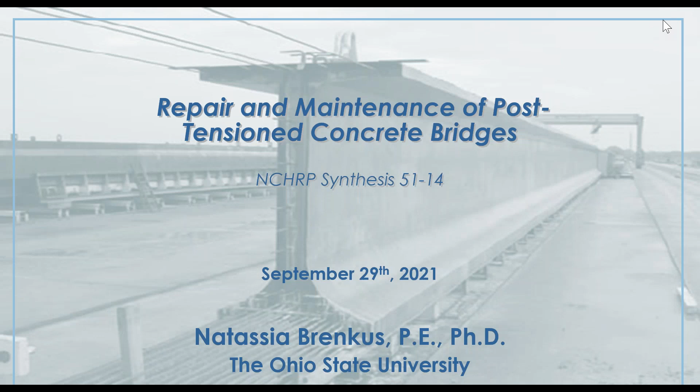There you are, all right, we see your screen. But maybe we still have you on mute. Can you hear me now? Yes, we can. Classic question. Yep, absolutely, it's the question of 2021.

Good afternoon, everyone. Thank you, Greg, for the introduction. Again, my name is Natassia Brenkus, and I am an assistant professor with The Ohio State University. As you mentioned, I will be presenting today on our research group's efforts to put together a report for the NCHRP program on the repair and maintenance of post-tension concrete bridges.

Just to orient everyone as to how these projects work, highway administrators, engineers, and researchers may often face problems for which there's already information, either documented or floating around out there in fragments. Synthesis efforts are undertaken to create a systematic assembly of that information and provide it to the highway community as a service to inform their practices. This particular project was an effort to gather information on the repair and maintenance practices of post-tension bridges, both in service and during construction, aiming to facilitate knowledge transfer across agencies so the information can inform bridge owners' repair and maintenance practices in the future.

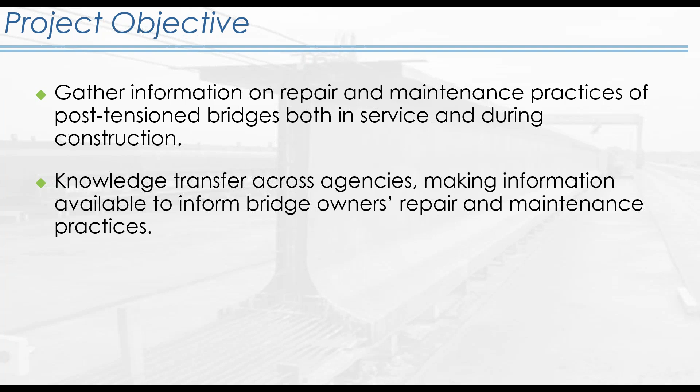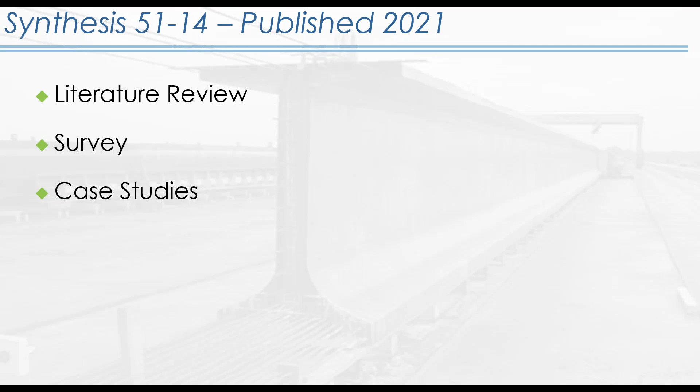This synthesis is 5114. It was published in 2021, and following the general format of these efforts, included a literature review of the state of the art, a survey distributed to state departments of transportation, as well as 5 case studies going into some depth on 5 separate structures that had undergone post-tensioning tendon repair and other actions to the PT system.

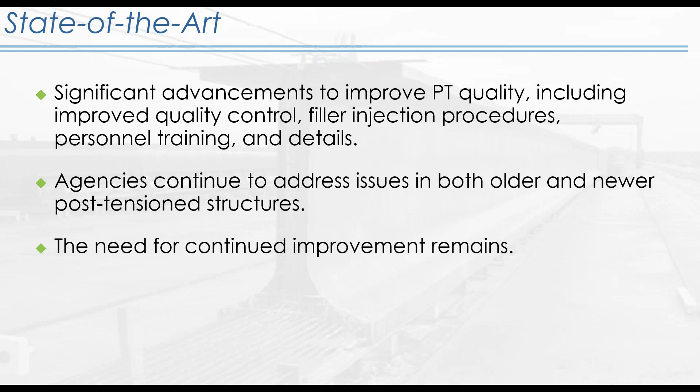Post-tensioning as a technology has been utilized in the U.S. bridge construction industry since the 1950s and has seen many improvements over the years. Recently, repair and maintenance actions have gained additional interest and attention due to some instances, although few, of serious tendon degradation in structures primarily built prior to the year 2000. Since the early 2000s, the industry has made significant advancements to improve the quality of PT structures, improving grout materials used as fillers, improving quality control and injection procedures, and creating certification and education programs for personnel. Agencies continue, however, to address issues in both older and newer PT structures, and the need for continued improvement remains.

We issued a survey to the state departments of transportation, and that survey had a scope to include aspects that may contribute to a repair need later on in the structure's life, related to design, construction, inspection, and maintenance.

We distributed an online-based survey to the 50 state departments of transportation in February of 2020, and we had participation in some form from every single state, which is fantastic. We followed up with communications with each Department of Transportation for additional clarification and some deeper questions.

Of the 50 states, 5 responses were partial or incomplete, but from the other 45 we have some valuable information. I wanted to paint a picture of the pool of respondents of the survey, with some information in the next several slides, so we all understand the pool of who's responding.

There were 44 state agencies that report having post-tension structures in their inventory. 6 states do not have any PT structures, including Arkansas, Iowa, Maryland, South Dakota, Tennessee, and Wyoming. Of the states that don't have a PT bridge structure, several reasons have been provided, including a lack of familiarity with the technology, concerns related to quality and durability, a lack of need for such a structure, and a lack of local established industry presence.

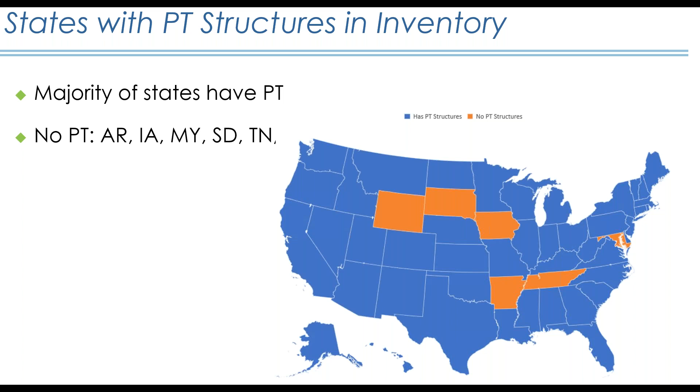The number of post-tension structures varies widely. Some states have no or few structures, and others have many hundreds. So from a broad picture perspective, the experience based on the inventory of a State Department of Transportation is pretty varied. At one end of the spectrum, California has nearly 3,000 PT structures, and on the other end, several states such as Delaware, New York, Rhode Island, and South Carolina have 5 or fewer.

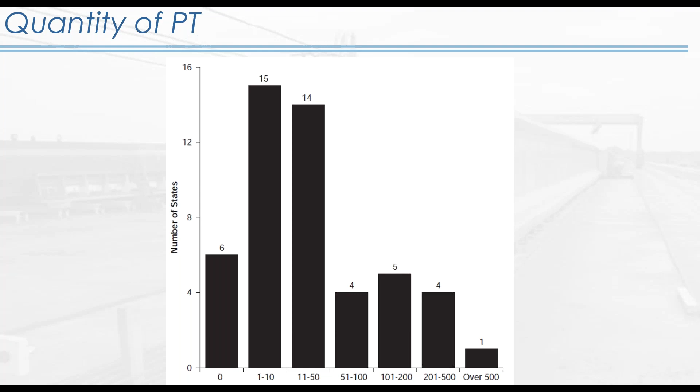Okay, so I think I have a duplicate slide. We have the scope of the survey. Now that we understand the pool of respondents, we'll turn to a discussion about the information that we gathered in the survey. A series of questions were aimed at identifying efforts by the various state agencies to understand where they are in terms of current and up-to-date practices.

The survey covered multiple stages of the PT structure life that could contribute to later need for repair, including design, construction, inspection, and maintenance stages. Questions were asked related to agencies' PT-specific specifications, for example the inclusion of protection levels from a designer's perspective, and quality control and assurance practices during construction, etc.

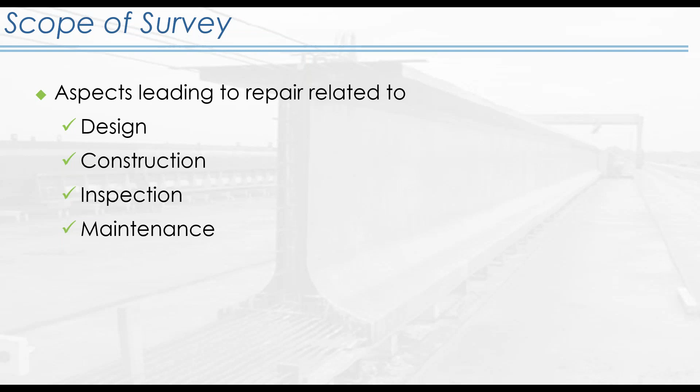In general, there was not uniformity in approach in the responses we received from the state DOTs, with a wide variety of guidance documents referred to, different certification programs, and different design approaches. This variety is not particularly surprising if we think about the wide range of PT experiences that exist from state to state.

Of the states with PT structures, the type included in their inventories was also varied. We have 44 states in the US that have PT structures, ranging from segmental bridge structures, found in a majority of the states responding as to whether or not they had PT in their inventory. 24 states have cast-in-place segmental structures, and 30 report having precast segmental structures.

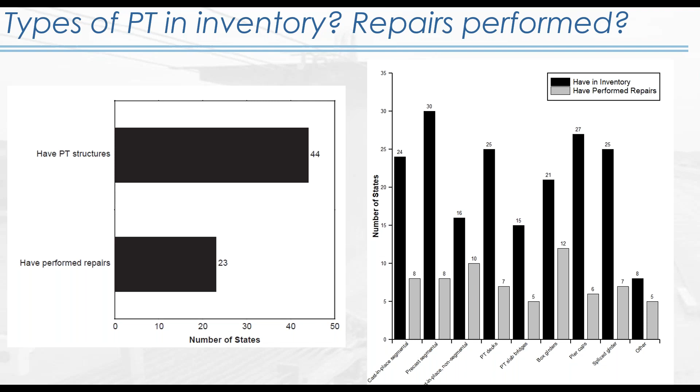As shown in this bar graph, quite a few of them have performed some type of repair on each type of construction shown here.

Most states have updated their specifications in the past 2 to 7 years. Agencies were asked to specify the documents they were referring to when they created their specifications. This helps us understand where they're getting their information, how old or current that information may be, as well as who they're turning to for advice.

So the state specifications, according to the respondents, have generally been informed by guidance documents such as the PTI ASBI M50 guide specification for grouted PT, the PTI M55 specification for grouting of post-tension structures, and the AASHTO LRFD bridge construction specification.

A notable number of the agencies are modeling their PT specifications from a couple of states. There are 7 states that refer back to Florida DOT's specifications when they write their own, and 4 states that refer to California's. There's another trend in which some states lean on the specifications of their neighbors when creating their own documents.

In general, though, the specifications reflect that the dissemination of lessons learned since the 1990s and early 2000s have made it into the specification documents of each state.

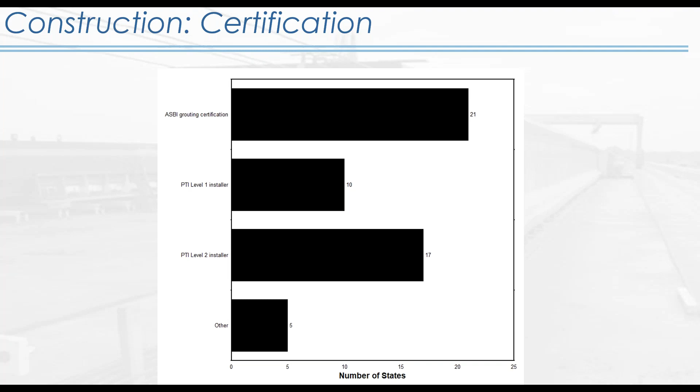The issues related to cementitious fillers, in other words grouts, which may be non-proprietary or proprietary, have been well documented in PT structures since the early 2000s.

Grout deficiencies in external tendons have been documented in several structures, and we have a couple of case studies included in our synthesis report. When grout issues occur in internal tendons, that is an order of magnitude more difficult in terms of addressing them with repair actions. So these are significant concerns.

Causes of poor quality grouts have been identified through owner-instigated investigations and various research efforts by different teams across the country. Some of the things that may contribute to poor grout quality include underweight bags, which affect the mix proportions, improper mixing technique, improper injection procedures, and more recently, some light has been shed on the effect of grout storage and handling procedures.

Agencies were asked whether or not they had specific grout storage requirements, and more than half responded in the negative.

Recent research efforts out of the University of Florida by Dr. Trey Hamilton have identified that susceptibility of grout to premature unintended hydration in instances of improper storage. So this is something of note, that despite the identification of this source, many states are not indicating specific storage requirements at this time.

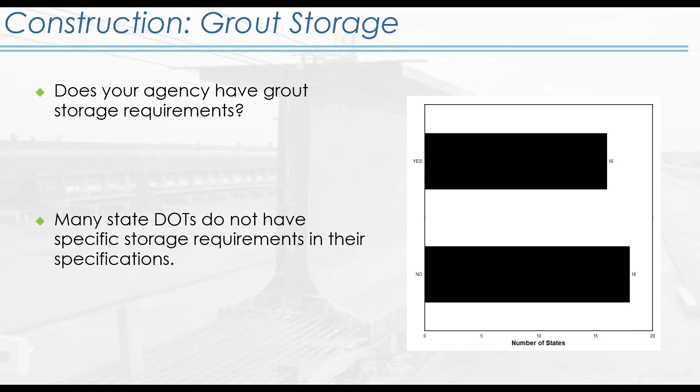Regarding inspection practices later on in the structure life, a majority of states are primarily relying on visual inspection by personnel not specifically trained or experienced in PT and its nuances.

Many states have performed non-routine inspections of their PT utilizing invasive techniques or attempting NDT, non-destructive testing aided approaches. Many states have also investigated through research programs the potential or feasibility for utilizing NDT in their inspection efforts. But at the end of the day, most of them are still relying on visual inspection.

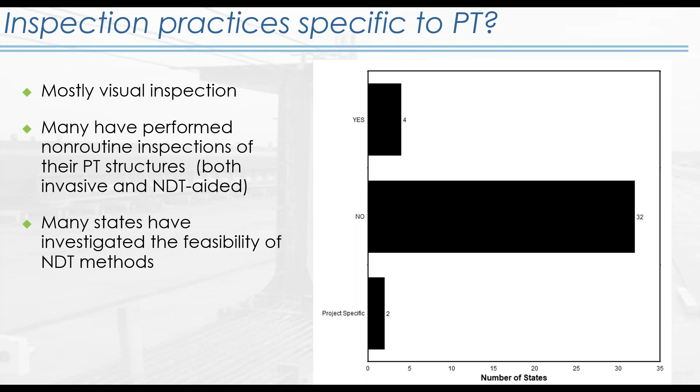Next we'll turn to talk about the repairs more specifically. We asked each state about their experience regarding repairs. A majority of the states, 23 of those that have PT structures, so 23 of 44, have experience with some form of post-tensioning tendon or PT repair.

Repairs are most often performed by contractors, especially when the issues are of an extensive nature or require some specialization. Some states occasionally, such as New Hampshire and Oregon, have performed repairs with their in-house staff.

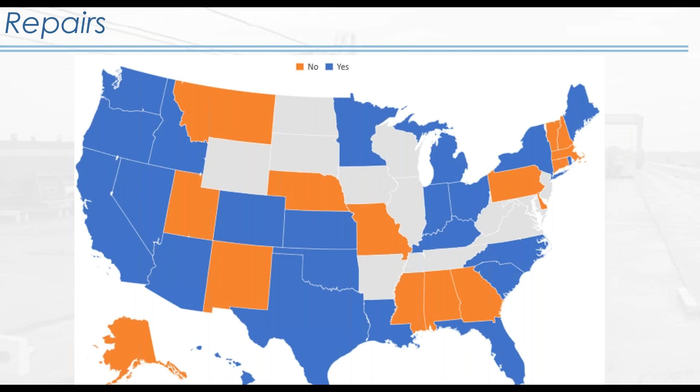We were interested in asking about what would instigate a PT repair. 17 states report having conducted a PT repair during the construction stages, which is when things are most often occurring.

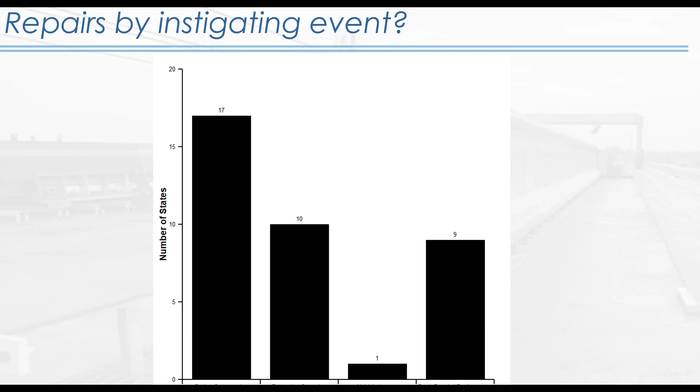Another 10 states have performed repair actions due to identification of corrosion in the PT structure. Only one state reports having performed a repair related to a vehicle impact, and another 9 performed repair associated with deck repair and replacement.

Looking at the types of repairs performed, the states identified a multitude of repair actions. This is what's shown on the slide. I won't go over each of these, but there are a couple things of note.

There are 6 states that have performed an external tendon replacement, at least by respondent report. 17 states have performed crack injection to a PT structure. What I find interesting is that 13 states report having repaired a pourback or an anchor blockout, detail that is of critical importance when we think about post-tensioning tendon force delivery to the system. Quite a few states have repaired that area.

A number of states have utilized, as I mentioned before, NDT aided inspections - 17 states have looked into this. So if you're working for a state agency considering that, know that there's quite a bit of experience out there in this realm.

Another thing of interest: there are 13 states that have regrouted tendons, and an additional 6 states that have strengthened a system through some means to address corrosion and impact damage.

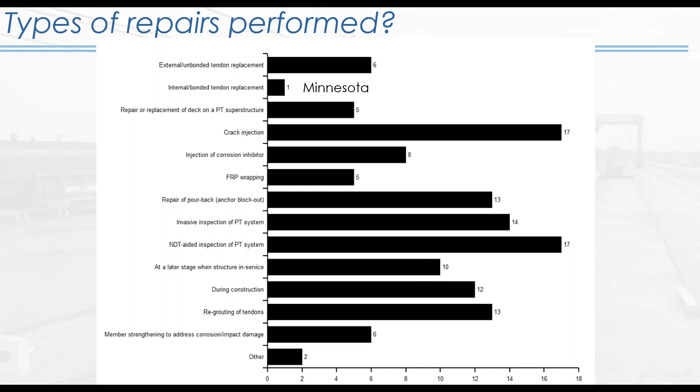Diving a little deeper, we wanted to ask about the stage of construction identified as the period with the most repair actions performed on a PT structure. We were looking for trends encountered during construction, and asked agencies to identify potential causes for later repair - asking them to comment on particular aspects of PT construction, using the word 'problematic' to cue whether they encountered problematic construction details, techniques, methods, or materials specific to PT construction.

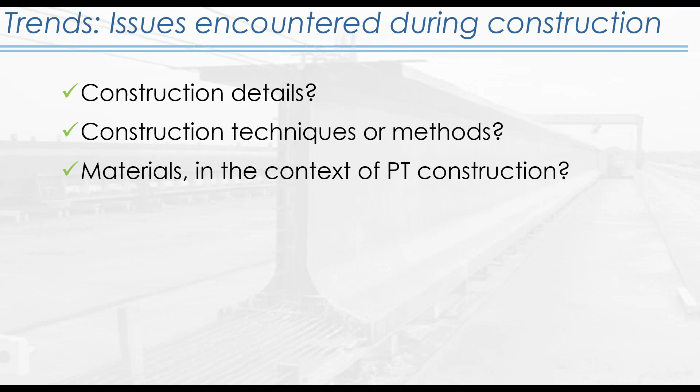Of the responding states, 35 went on to answer this set of questions. Nearly half report issues with problematic construction details. We asked them to identify those details - most commonly, issues with duct splicing details, anchorage pourback details, and confinement reinforcement. Not surprising, many of these details are related to geometry and alignment, and are not necessarily something you wouldn't encounter in another type of bridge construction.

6 states identified other details of concern encountered in construction of their PT structures, including issues with large shear keys that cracked during erection, conflicts with blisters and deviator geometries - again related to alignment and geometry - including concerns with sharp corners in deviators that led to kinking or damage of the tendon duct.

Several case studies in our synthesis revealed duct conflicts at diaphragms and deviator locations as a recurrent problem that occurred before modifications to connections and refinement of standard practices in the 2000s improved these details. So there have been changes to practice that have improved this, but agencies are still having to manage structures that exist from before that time period.

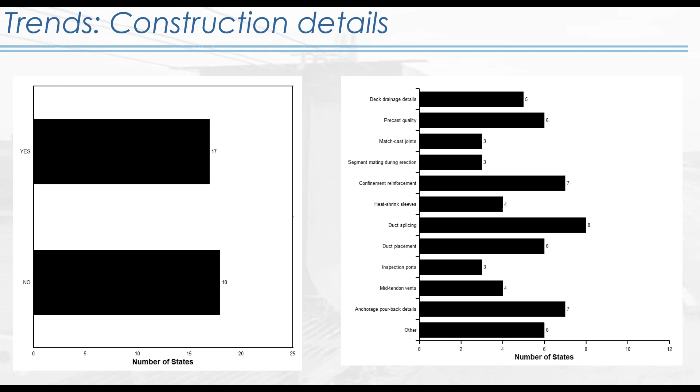Respondents less frequently identified construction techniques and methodology as problematic, suggesting that recent efforts to educate personnel engaged in PT structures through certification programs may be proving beneficial in improving the state of the art. Of the 36 people that responded to these questions, 12 told us that yes, some construction technique or methodology was of concern.

Issues identified by those states included grout filling procedures, air pressure tests, vacuum tests, etc., all occurring during the injection process. One state stressed rather emphatically the importance of personnel requirements, to ensure people working on the grouting procedure during grouting were properly educated and experienced, in order to ensure the end product quality.

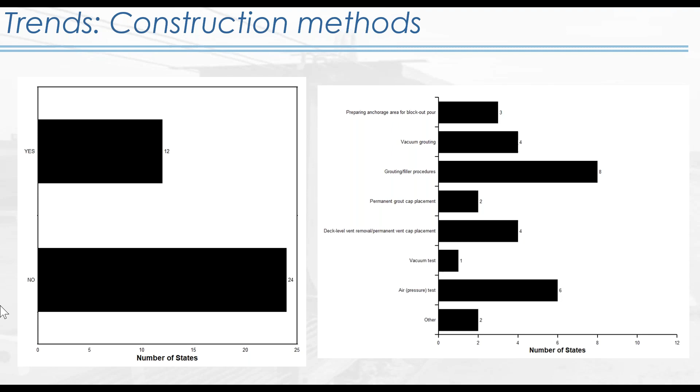15 of the respondents reported dissatisfaction with specific materials used in post-tensioning, with the primary material of concern being that grout filler material that we mentioned earlier.

Other states also talked to us about issues with the pour-back materials. Looking back at the detail around the anchorage, they described these materials as difficult to apply or resulting in later shrinkage cracking. I'll note that no state has reported any issues with the flexible filler material, but that's not surprising given that this type of filler is a recent introduction to the US bridge industry.

States reporting issues with grout filler materials provided further comment suggesting their response was informed by issues of the past, before the introduction of pre-bagged thixotropic grouts. Several states called specific attention to problems with excessive bleed water and chloride contamination, again mentioning structures that had been constructed before the 2000s.

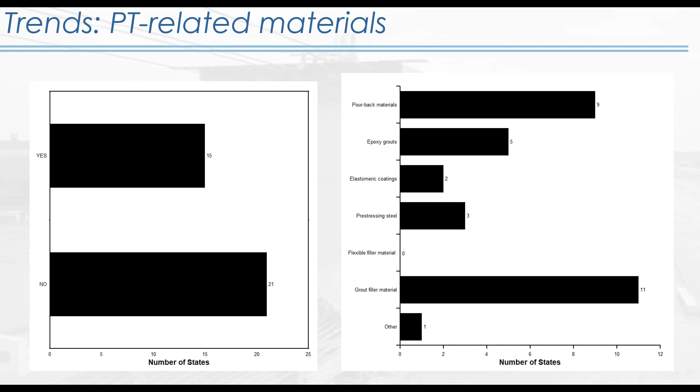I'll go on to describe five case studies that we conducted. If listeners have significant interest in the details of each situation, I'll point you to Synthesis 5114, and I'll talk about a few here.

We looked at the Wonderwood Connector in Florida, the Wando Bridge in South Carolina, the Veterans Glass City Skyway here in Ohio, the Varina-Enon Bridge in Virginia, and finally the Plymouth Avenue Bridge in the city of Minneapolis.

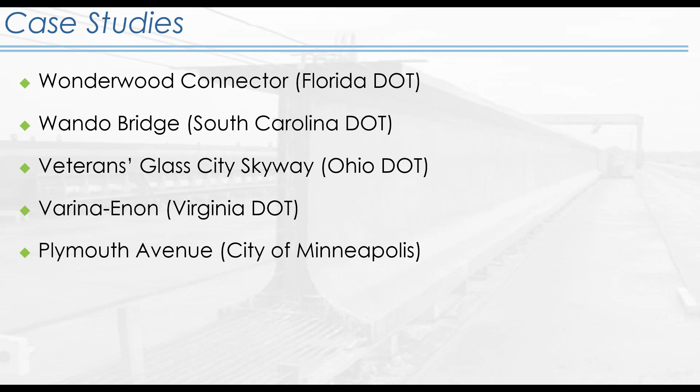I'll highlight a few of these. We talked to the Florida Department of Transportation about the Wonderwood Connector, located northeast of Jacksonville. It's a 0.7-mile long post-tensioned I-girder structure with internal tendons, initially built in 2002 to 2004.

What is going on with this case study is that after identification of chloride intrusion in other tendons in other bridges utilizing the same grout injected into this structure, the bridge owner ordered an invasive inspection of a limited number of tendons and found some corroded ducts and soft grout.

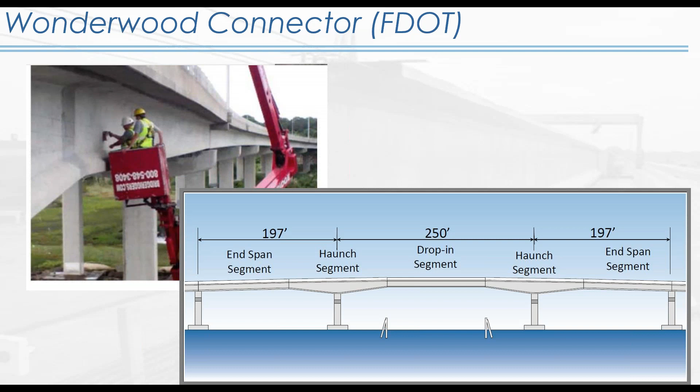The bridge is currently undergoing extensive repairs following a series of inspections that revealed additional tendon corrosion and severe grouting issues. At the time of the writing of the synthesis in summer 2020, the repairs were underway, and there are a couple interesting aspects to this case study for agencies that may have particular interest.

The agency is trying to remedy grout issues with internal tendons in continuous I-girders. They approached this through first drying the tendons to remove residual moisture, and by injecting a proprietary corrosion inhibitor for additional corrosion protection. Finally, they will add additional strengthening through the installation of additional external tendons.

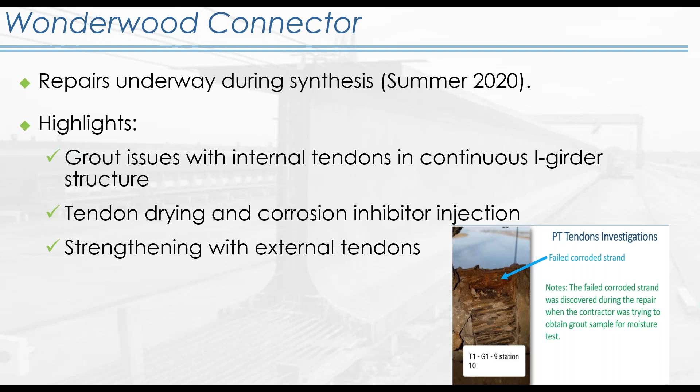One thing we saw in a couple of our case studies is this idea that has now been utilized in a couple of structures - this idea of tendon impregnation using a proprietary material that acts as a corrosion inhibitor.

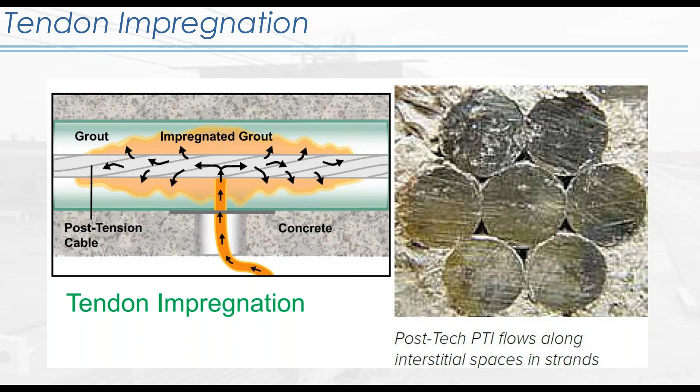The Wando Bridge in South Carolina is the I-526 bridges over the Wando River, a pair of precast post-tension box girder structures spanning between Mount Pleasant and Daniel Island, South Carolina. Construction occurred much earlier, in the mid to late 80s, before many of the lessons learned that are now employed improving the state of the art.

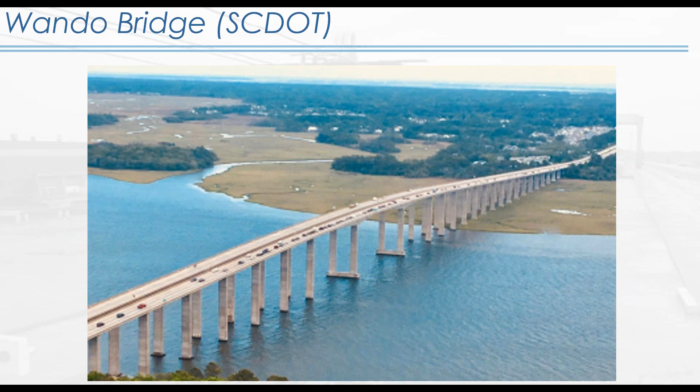Routine inspections by the bridge owner were occurring through the early 2000s, reporting that the bridge was in good condition, although white deposits were regularly noted and attributed to pigeon droppings. Significant water intrusion in 2010 coincided with the agency initiating an external asset management contract, and an in-depth inspection revealed a multitude of concerns, including a suspected tendon loss, inferred from spalling and leakage in one of the piers.

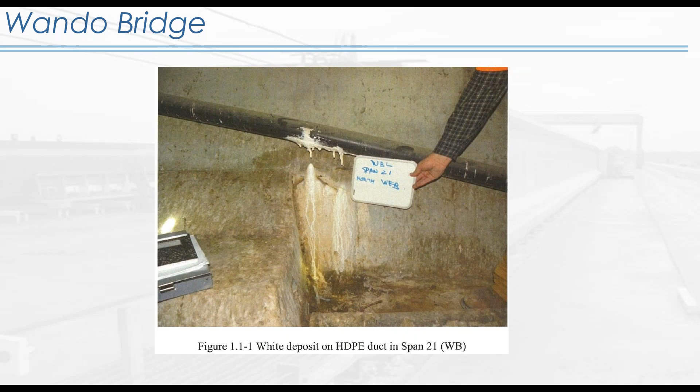A series of inspections and repair actions have been undertaken to address issues with these structures over the years. As of the time of writing the synthesis report, additional repairs were underway. With most repairs complete, the bridge was opened.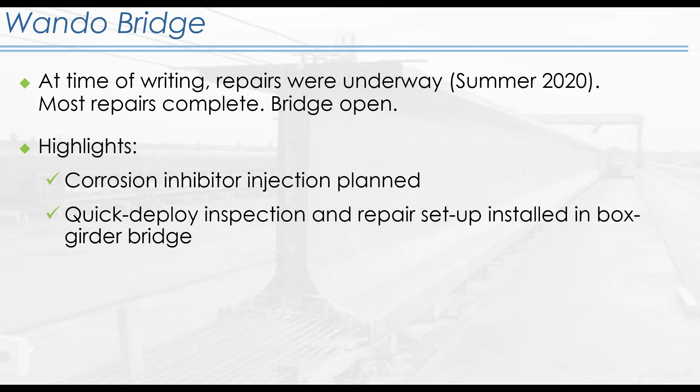This is yet another example of a structure utilizing a corrosion inhibitor injection as another form of protection for the system. They were also working on installing a quick deploy inspection and repair setup inside of the box girder bridges to address any future issues.

And so finally, in terms of the case studies, I will point out a different example of an issue with a PT structure, or a case study of some PT repair that has been performed by the Ohio Department of Transportation on the Veterans Glass Skyway, which is over the Maumee River in Toledo, Ohio. This is a critical section of I-280, and again, this is a relatively recent structure built between 2002 and 2007.

This bridge has many innovative features, but our topic today treats the bridge wearing surface, which was integrally cast with the section. So the girder was cast with a 2-inch thick integral wearing course, and then another 2.5 inches of supposedly concrete clear cover.

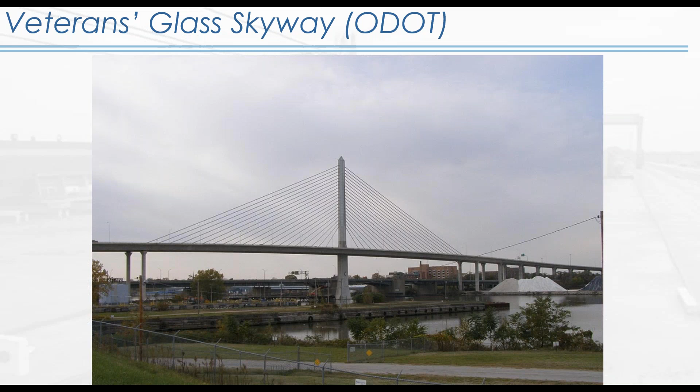And when the Ohio DOT attempted to replace that integral PT deck, they uncovered issues, which is that there was insufficient concrete cover protecting the transverse tendons, and on further inspection, these transverse tendons were insufficiently grouted.

So the project, they're attempting to replace the bridge deck by milling off 1 inch of the overlay and hydro demolishing the next half inch in order to get that rough surface for resurfacing.

As they attempted to perform the demolition, however, they were exposing these transverse tendons in the top flange in more than 70 locations. So the agency hypothesizes that the voids are the result of improper duct filling, which contributed to duct damage when they were coming through with the hydro demolition.

Locations of the duct damage are currently undergoing repair, which is a multi-step process, involving further water blasting to remove the loose debris, epoxy over the exposed strand, and then providing a rough surface with the application of some sand, finishing off with a final concrete cover layer.

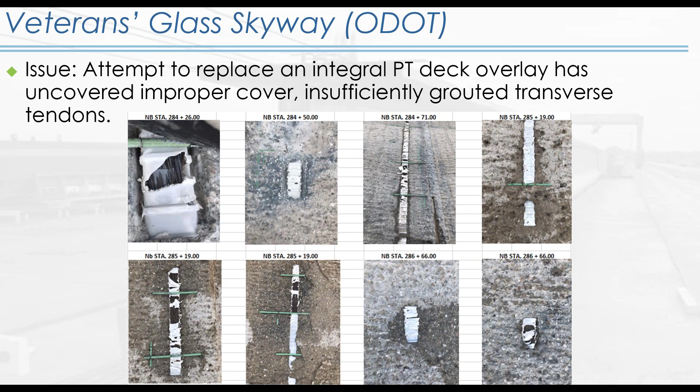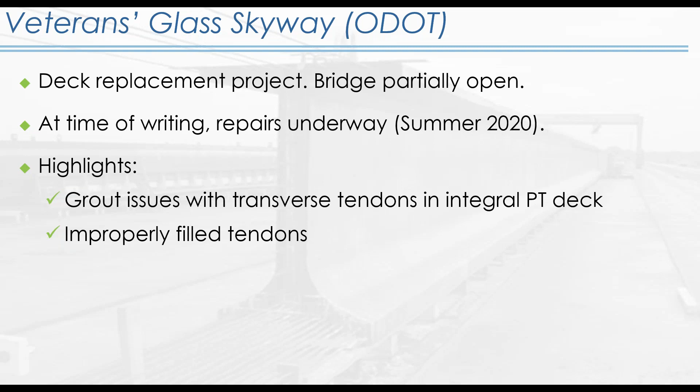So this bridge was partially open at the time of the writing of the synthesis, last summer. This project, if you're interested, has grout issues with transverse tendons in the integral PT deck, and a couple instances of improperly filled tendons that the agency is attempting to address. I put that out there for agencies that may be looking at similar scenarios.

So the synthesis takeaway, just a couple of bullet points that we found of interest in our work. One, the consideration of durability during the design phase is currently not practiced as widely as perhaps may be desired, meaning that from the design stage, we are not looking at things from the perspective of long-term durability and the assignment of a protection level.

For these structures, there remain some issues with methods of construction, as we previously discussed, most often related to grout and filler injection and duct pressure testing.

Finally, I'd like to again note that routine inspection, as we came to describe in several of the case studies, was insufficient to identify issues with PT structures before they became critical. So I would recommend that inspection be performed by personnel with specific PT experience to further facilitate the identification of problems before they become more severe.

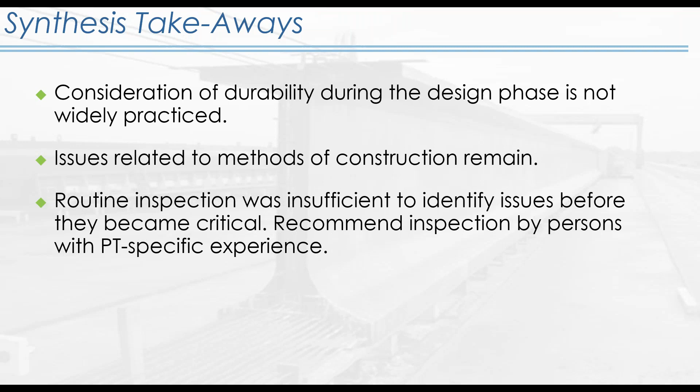So with that, I will conclude. If you would like additional detail, I believe it is included as part of the GoToWebinar as a handout. If not, if I'm mistaken, the NCHRP synthesis report is available on their website. So thank you, and I'll stop there.

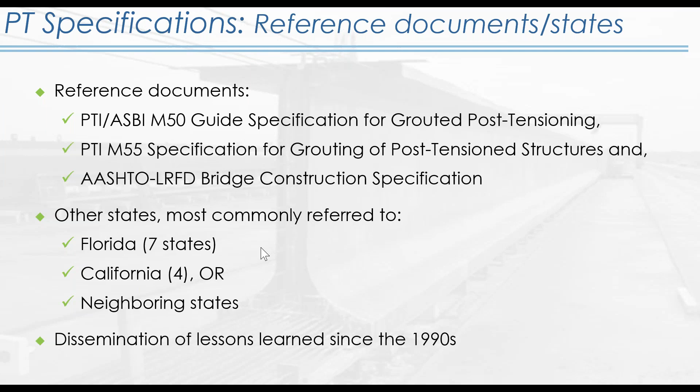Well, I can add to that, having been involved with some projects constructed recently, where the owner did not have a statewide specification for post tensioning in their construction specs, so project specific specifications were developed for the project. Candidly, they were apparently done using some older versions as go-bys, and they certainly weren't referring to the current PTI ASBI specifications for grouting specifically, and they called for flushing of the ducts with water - a practice that was suspended some 20 years ago in recognition that you're never going to get the water back out of the ducts, so now you've introduced water that's just going to further mess up your water cement ratio in your grout, because it's going to be absorbed into the grout as you're grouting.

Ideally, the thixotropic grouts that we use today do push out a lot of that water, but deliberately introducing water into a duct is not advisable. So it's a little segue to say, yes, there are project specific specifications, and when an owner or even a designer uses those, I would caution to make sure the reference documents used to create those are current specifications, industry standards, particularly the PTI ASBI specs.

So yeah, I see you have your slide up now about protection levels, and I think that does warrant a little more discussion about your findings in terms of what you learned about owners and protection levels that were specified.

I just wanted to say that I think maybe we're talking about the specific detail in terms of specification, not whether or not a state has PT specifications in general. There are only a handful of states that are utilizing project specific protection level specification. The majority of the states do have some form of PT specifications in place.

Okay, so then it's really more about the protection levels, not specifically like the plans saying must conform to PTI ASBI protection level 2 or whatever, right? Right, so that was not clearly described when I was going over this slide, but in this particular instance we're talking more specifically about the protection level concepts that PTI has included in their documents.

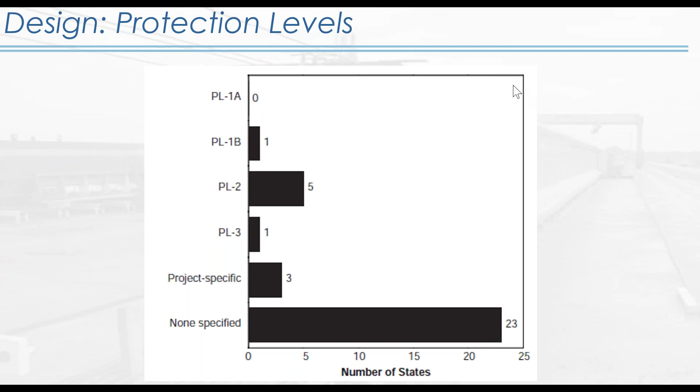Guess in the meantime, I will hop back over.

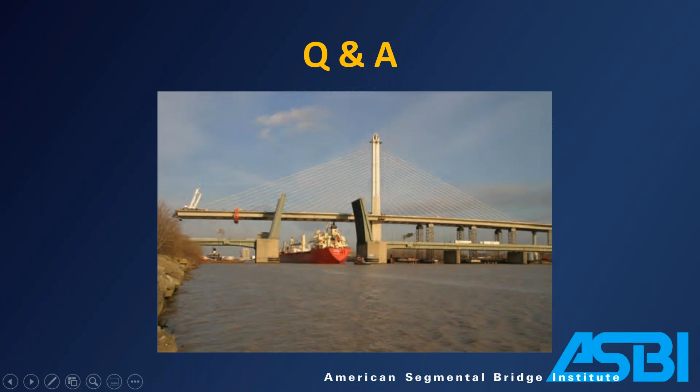Do I need to give you permission? No, I've got it back.